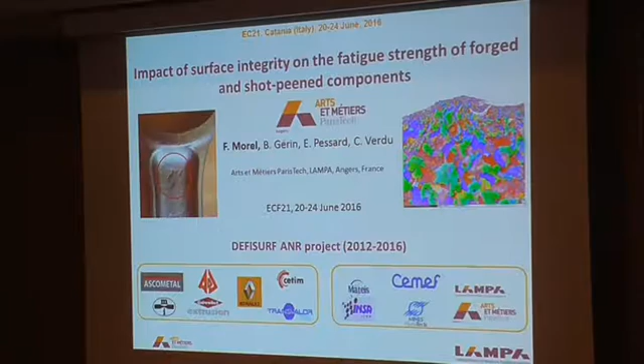Something different, but something close. I'm going to talk again about defects, but different kinds of defects. More exactly, I will try to explain how defects coming from forging and shot peening operation can affect the fatigue strength.

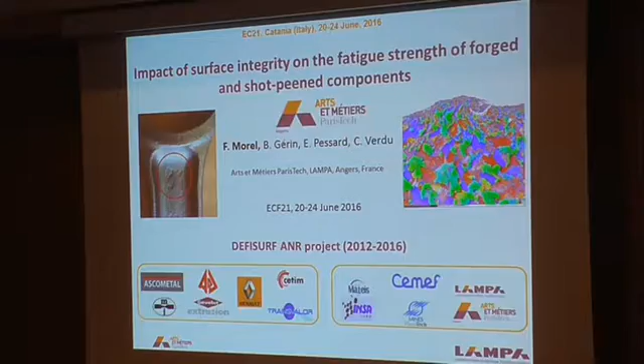This work has been carried out in the framework of a French project gathering several academic partners and several industrial partners. The aim of this project was to study the influence of the surface integrity on the fatigue behavior of forged components.

We used two car components, the connecting rod and the transmission shaft. There were two main parts in this project: the process simulation, as you can see here for shot peening, and the characterization and modeling of the fatigue behavior.

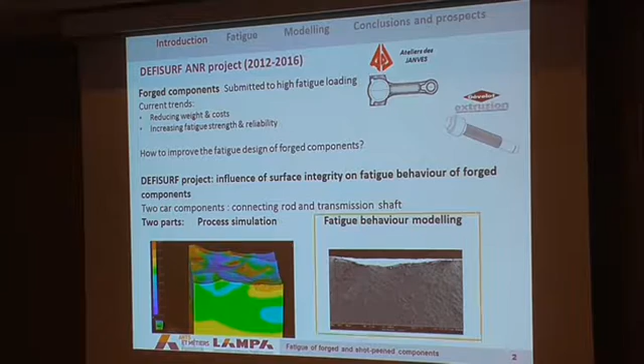About the fatigue, we investigated both the initiation phase and the propagation phase by X-ray tomography, but I will focus today only on the initiation part of the work.

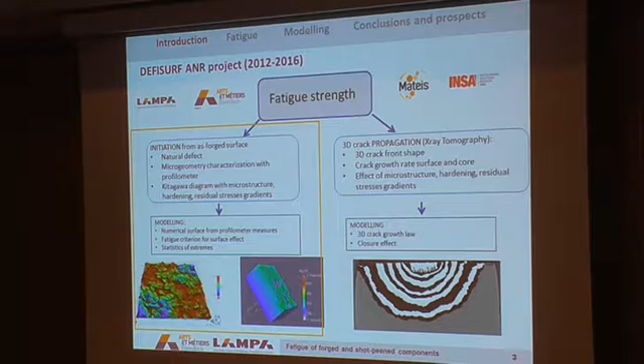About the component under interest, it's a very well-known connecting rod made of pearlitic steel, obtained with several stages. We have stamping steps, shot blasting steps, and we observed something very interesting.

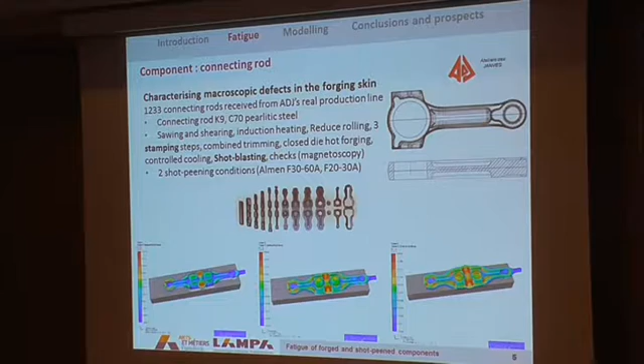What's specific about this work is that we used a huge number of connecting rods to make statistics directly extracted from the production line. For instance, if I take around 500 forged and shot blasted connecting rods directly from the production...

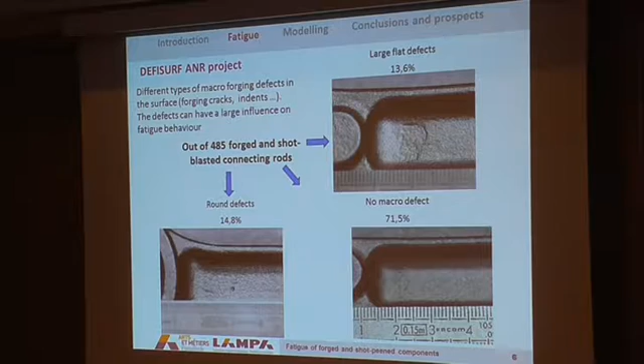I try to make simple statistics about the kind of defects that can be observed. For 14% of the connecting rods, you can see that kind of defect—nothing else but some scale encrusted at the surface of the part—and some round defects for 15%, with the majority having no defects. So we're going to have a look at what happens with those defects on the surface.

What we did: we used electric discharge machining to extract directly from the connecting rods some plain specimens. You see here the geometry of these specimens.

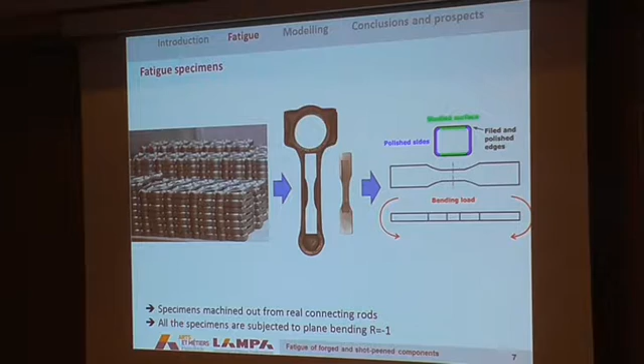We apply plane bending, purely reversed loading, on this specimen. We did that for different batches and configurations: as-forged surface before any mechanical surface treatment, shot blasting treatment used to remove the scale from the surface, and controlled shot peening—two types of shot peening. We also have a reference with no defect and no residual stresses, a polished batch.

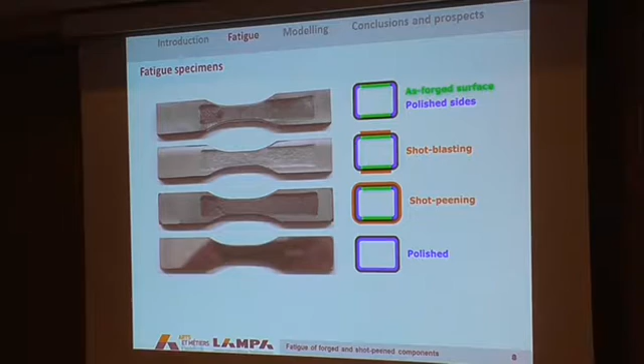So we carried out many tests, and before every fatigue test, we perform a scan of the surface of all the specimens using a profilometer with an interferometry method. You can see here the example of what we observe for the as-forged case, for two types of shot peening with different shots, and for the shot blasting conditions.

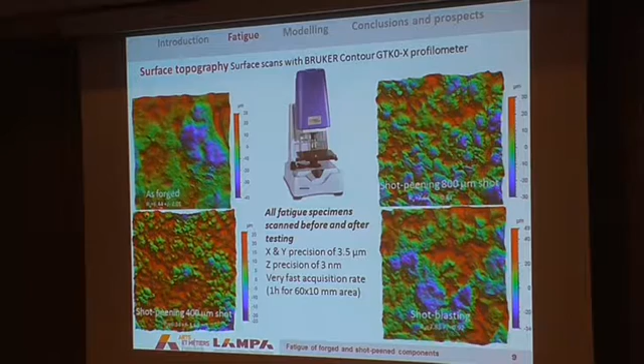You see here that some defects occur in some locations. And you see here the values of the roughness, the average roughness—but you can trust me, you can't use this roughness to get an estimation of the fatigue strength.

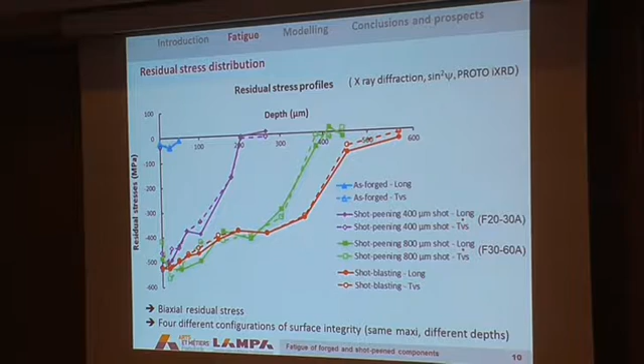We also performed some measurements of residual stress. You see here the 4 conditions, and you observe some biaxial residual stress everywhere in depth. We tried to get approximately the same maximum value of residual stress, around -500, but by changing the condition of the shot peening we got different depths of the profile.

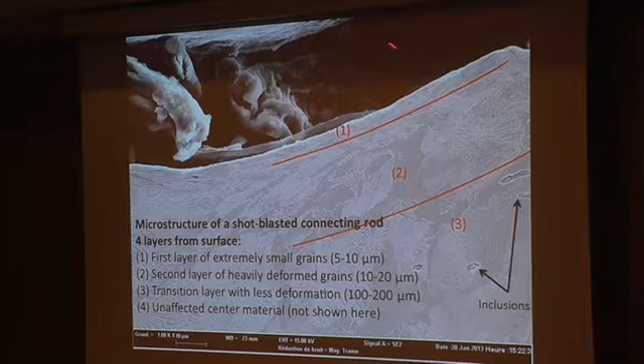Now, when we look at what happens after shot blasting—forging and then shot blasting—without any fatigue, what you see here is the effect of the ball. You recognize the impact of the ball, and under this impact, usually we can distinguish 4 layers from the surface. The first layer of extremely small grains, you can see this layer here.

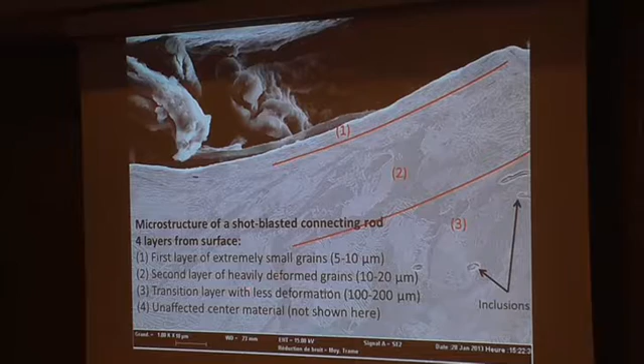A second layer of heavily deformed grains, the transition layer, and the original material here. You see on this picture, again, the impact and the gradient of microstructure.

What's very interesting here is that in some locations, due to the process, you can observe some cracks or folds, as you can see here. You clearly see what I mean by fold in this picture.

You don't know exactly what this is, and when you use an EBSD map, you clearly see that this is scale—scale incrusted into the material and potentially leading to a crack.

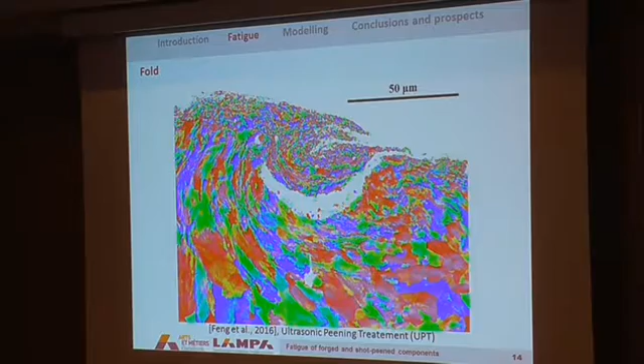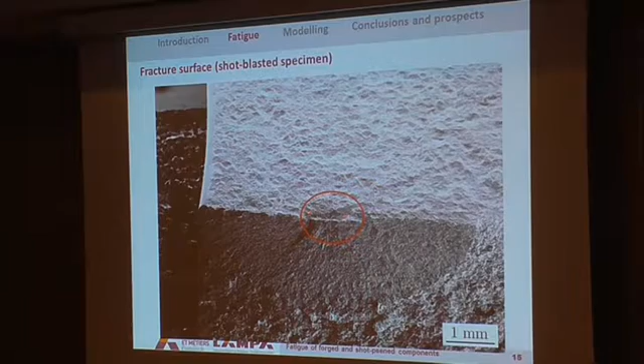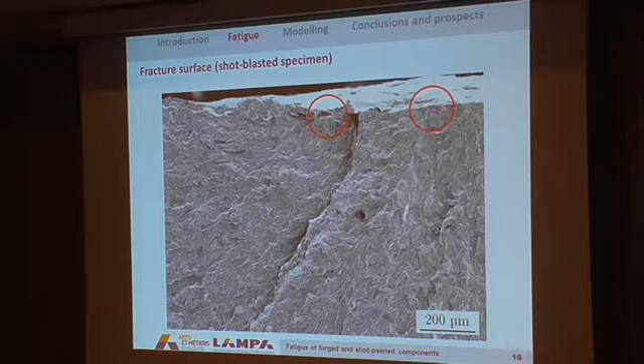You see here that the crack initiates from an old macro defect, in which, if we take a closer look, you see that at the bottom of this defect there is a fold. So to get a crack, you have 2 conditions: first, a macro defect, and second, a fold or a crack due to the action of the balls.

Now, what is clear and what is great with this work is that for every fatigue test, we perform a scan at the surface.

So we're able to find among all the defects which one is responsible for the crack. If you look at these two pictures, you see it's not easy to find which defects would be responsible for a crack initiation. I can tell you that the crack initiates here and here.

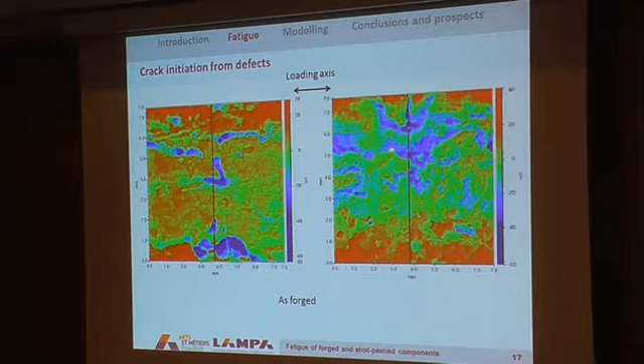Now, if I try to draw a Kitagawa diagram for all our conditions with the fatigue strength as a function of the square root of area, you've got these points, with the reference here, the polished reference here. For the as-forged conditions, you see the effect of the defect size, with a large scatter here. And for the shot blasting and the two conditions of shot peening, you see also the effect of the defect size.

What's important here is that even for the as-forged conditions, the presence of defects induces a drop of up to 34% compared to the reference, whereas for the other conditions, we got something like a 35% increase of the fatigue strength.

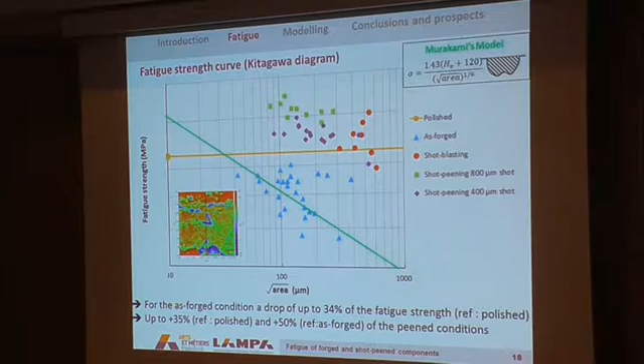But what's important is that for the biggest defect in shot blasting, you got something close to the polished fatigue strength. So you have to take into account the effect of the defect and, of course, the effect of the residual stresses. That's what I'm going to do now in the fatigue strength modeling part.

We did two things. First, simple things which consist in approximating each defect with a semi-ellipsoid. We try to build some statistics. If I draw the square root of area for each specimen, for instance specimen number 1, the blue point represents all the defects - we got something like 100 defects - and the red one is the defects leading to the crack.

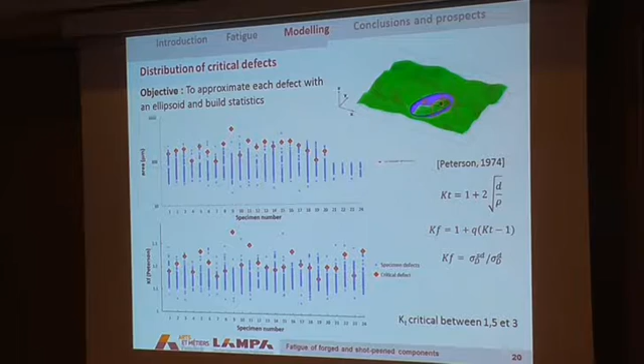The same goes for if I use the Peterson law, the Kt. You see that the result is not that bad - we're able to find a good tendency, but we still don't get every detail of what happens with this simple approximation of the defect.

What's interesting with this simple formulation is that when I take this case where you've got a big defect and a smaller one, the crack initiates in the one where the stress concentration factor is the highest, and not necessarily where the square root of area is highest.

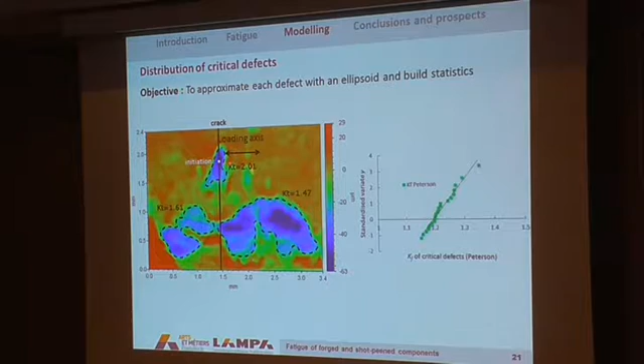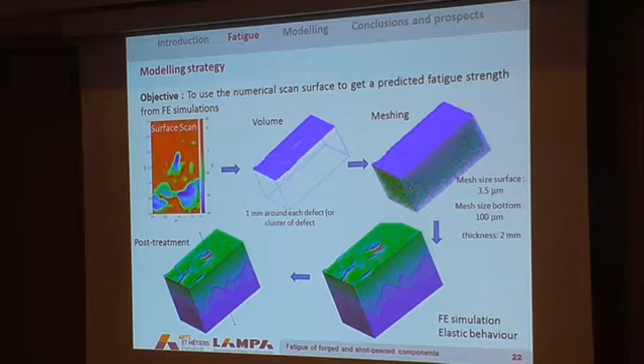Now we try to go further by using our surface scan to create a model which represents the real surface with the defect under interest and around 1 millimeter around the defect. We mesh this volume with a mesh size of 3.5 micrometers at the surface and 100 micrometers at the bottom, and we perform finite element simulation.

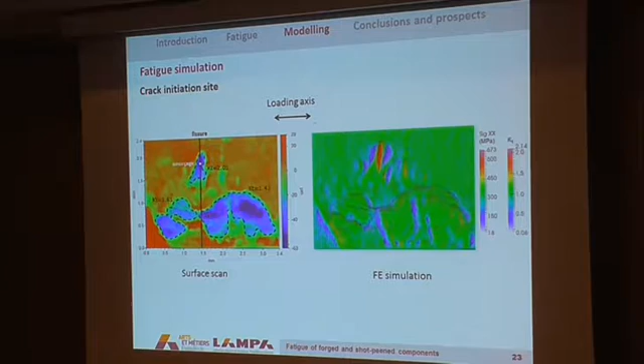What we observe is that for the same area discussed previously, we observe this kind of distribution of the sigma XX stress. We are able, of course, to get some information about the stress concentration factor. But what we did next is use something close to critical distance, but it's a non-local approach using the Dang Van criterion.

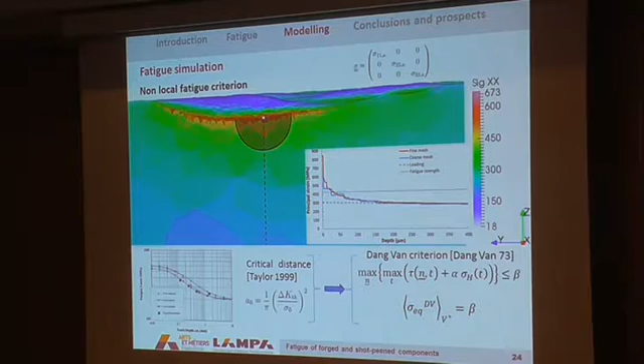What we did is try to introduce into the criterion the effect of the residual stresses. If we perform such simulations and such assessment of the fatigue strength, we are able to clearly decrease a lot of the scatter.

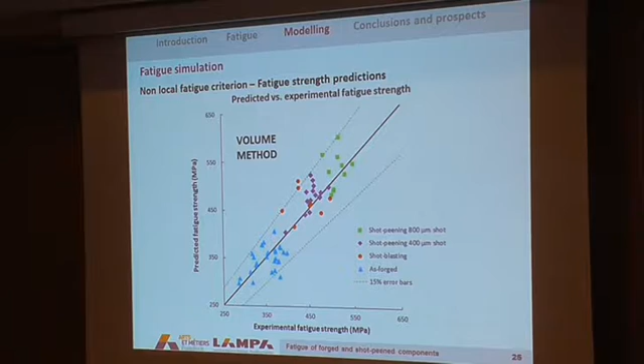To conclude, I just want to sum up my talk by saying that we studied several configurations of surface integrity, including the effect of microstructure gradient, residual stresses, surface topography, and the presence of defects.

We performed plane bending tests, and by using finite element simulation with a simple non-local multi-axial fatigue criterion, we were able to predict the fatigue strength by taking into account the effect of residual stresses, with an error bound of plus or minus 15%.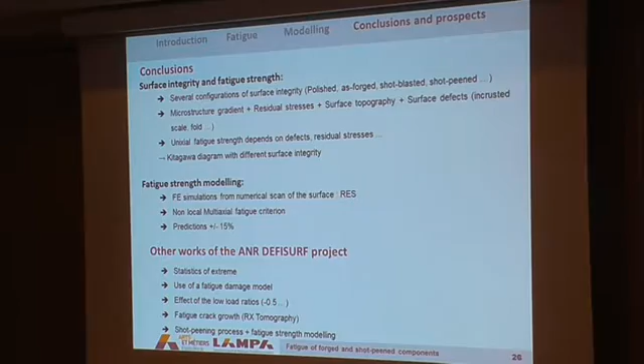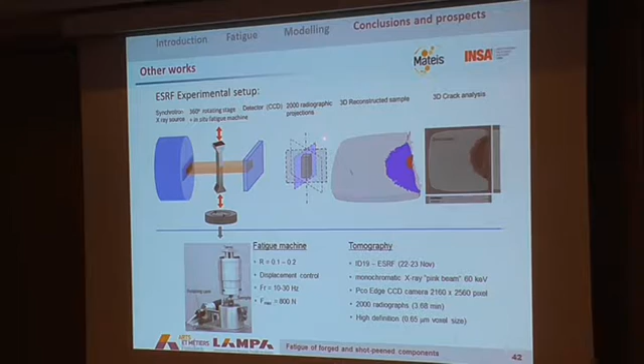We did many other works in this project, like studies about crack growth at the synchrotron, using once again some specimens extracted and machined from the connecting rod.

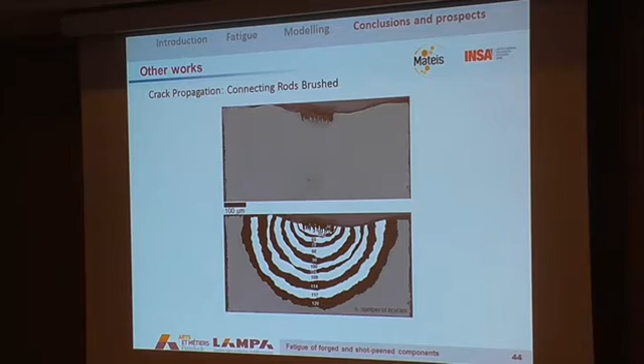What you see on this picture is the crack growing from a defect we introduced at the specimen surface. The same here for the shot blasted - what you see is the development of the crack front as a function of the number of cycles.

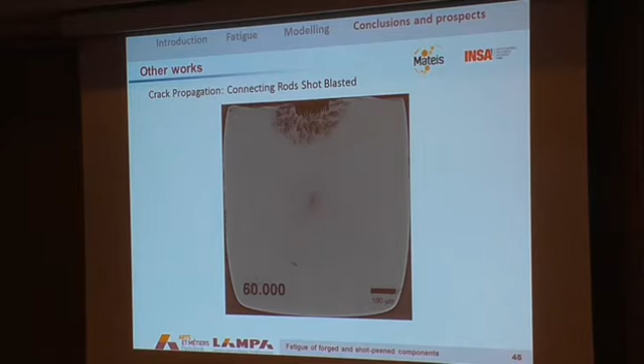By doing so, we are able to investigate the effect of the crack growth rate as a function of the stress intensity factor. And what is very surprising is that we don't observe any effect of the residual stresses on the crack growth.